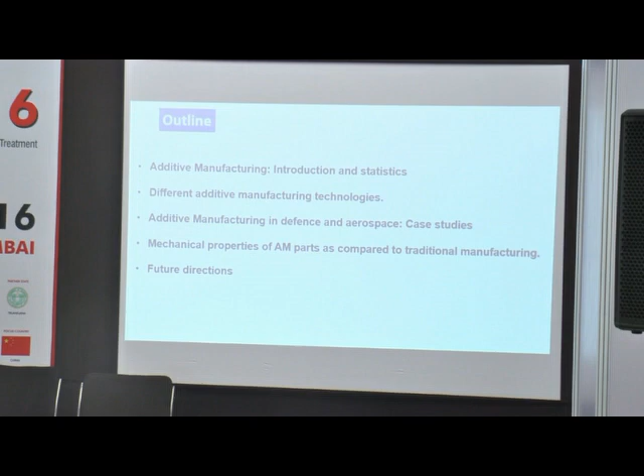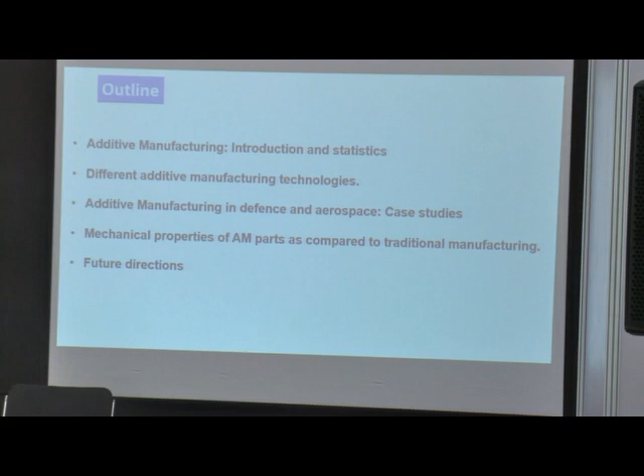So the outline of my talk would be, I'll give an introduction about additive manufacturing and all the statistics related to it. I'll just briefly touch upon the different additive manufacturing technologies. Then actually present the different case studies or examples which are used for the defense sector. Then moving on, I'll be comparing the mechanical properties of the AM parts as compared to traditional manufacturing, cast and forged and all that. Finally, future directions on making AM more inclusive or more popular, how to go about it.

So additive manufacturing, as per the ASTM definition, like what John had given yesterday, is basically defined as joining of materials layer by layer, where the input is directly taken from 3D model data. It is different from traditional manufacturing, which is subtractive manufacturing, because to come to the near net shape part, you have to do final machining and everything. In this, you do some machining to have a good surface finish, but what you get is a net shape part in the end. You feed a CAD model and you get a part out.

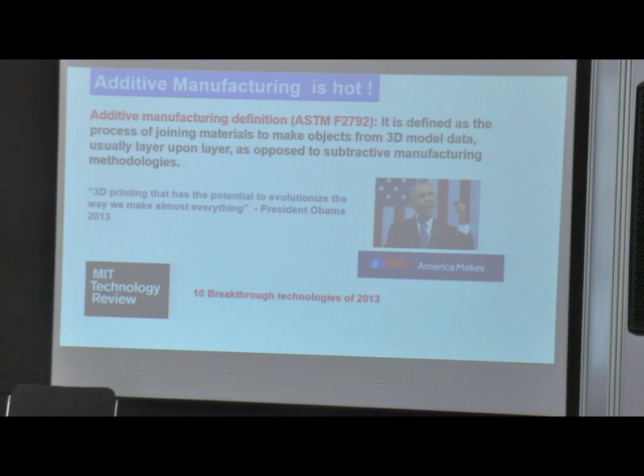Obama actually in 2013 declared that 3D printing is going to revolutionize the world. And I think it is living up to the hype. Additive manufacturing is just growing rapidly. And he has set up additive manufacturing centers, America Makes. It was also voted as one of the 10 breakthrough technologies by MIT Technology Review.

So just to give a snapshot of additive manufacturing, you have a CAD model, and you feed it in an STL file, which is a typical 3D printing file. It's called a stereolithography file. The file slices all the information layer by layer, which is given to the equipment or the machine. Then it starts printing layer by layer, and you get the final product.

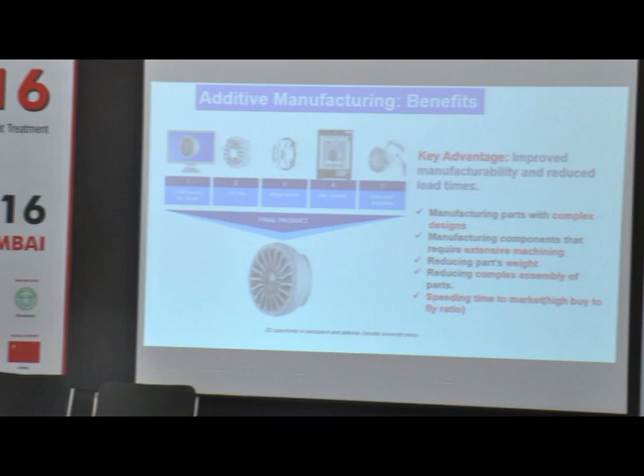So the advantage is you can have any complex design you want in the design model, and you can get that out. If the component requires extensive machining, it's better to go with additive manufacturing. It also has the potential to reduce weight, because you can come up with new designs which are strong but lightweight, like lattice structures or porous structures. And the assembly of parts can be reduced, because usually they assemble different parts to get a final complex shaped part, but in this you can directly manufacture. So you can reduce a number of parts to a single part.

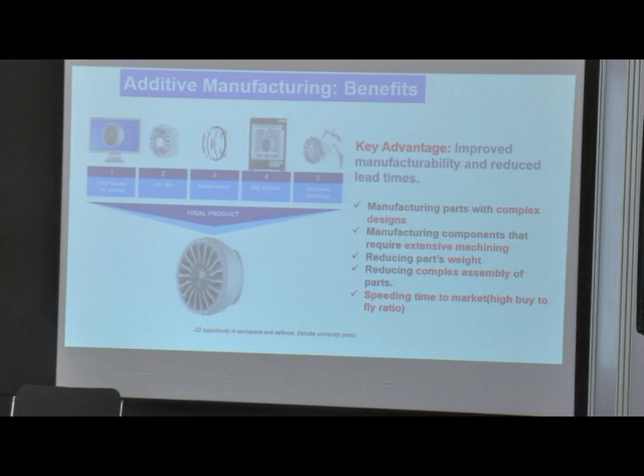So the buy-to-fly ratio is good, and the speed to market is fast. It can be termed as on-demand manufacturing, where you put a demand with a design, and then you get the part out.

When you look at government spending by country, Singapore is spending heavily. It's part of advanced manufacturing techniques, so apart from additive manufacturing they also invest in other techniques like robotic welding, robotic machining - all of those come into the same package.

In the US, only NAMII is giving about 50, and there's other investment in defense, Navy, and so on which I couldn't get figures for. But I think right now - this was 2014 data - it's spread much more, and many other countries have joined this bandwagon of additive manufacturing. I'm not sure about the Indian government; I think they still have to get into this.

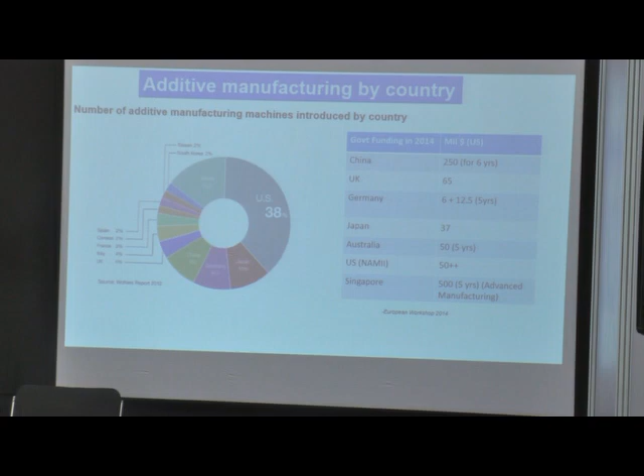As far as the number of machines is concerned, since the US is a big country, the maximum number of machines being introduced are in the US.

So I'll just briefly touch upon the different additive manufacturing processes, starting with plastics and polymers, and then moving to metals.

The first is VAT photopolymerization, also called stereolithography, where you have ultraviolet-curable liquid resin put in a tank, and a laser or ultraviolet source scans across based on the 3D model. Once a layer is scanned and set, it's lowered down to go to the next layer, and it's scanned again. This keeps going on until you get a final net shape part.

The advantages and problems are: it's usually very accurate and very fast, but has very limited materials, and it's also an expensive process. Traditionally, many of the plastics are used for prototyping, because once you get the final design in a prototype, you can quickly make the same design as a metal part.

So it has been used for prototyping and sometimes casting patterns. There is also a binder jetting process, where you have a powder - it can be a metal powder or a ceramic powder. You jet a binder and scan across layer by layer, so you get a green compact that binds the contour. Later you remove the excess powder and do post-processing like sintering and heat treatment. This is a much longer process requiring post-processing and curing.

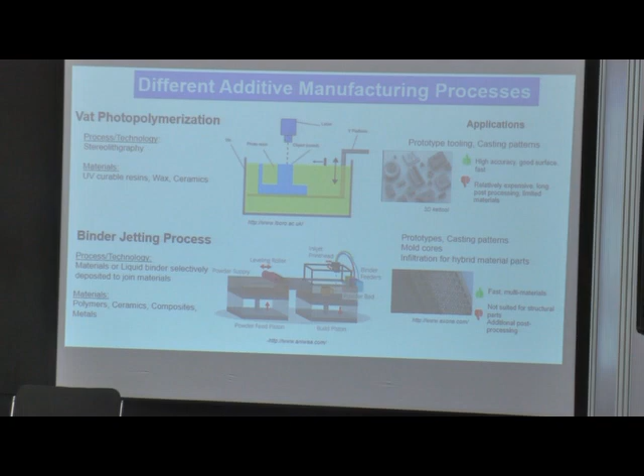But this can be applied to ceramics as well - ceramics, composites, even metals, we have a binder jet process. Also, one good thing is if you make a porous design, you can do hybrid materials - you can infiltrate with a second material. Like yesterday he was talking about having steel and infiltrating with bronze, and then you get a hybrid material.

Then there is sheet lamination. This is relatively less popular, but it's about having a sheet, then a laser or something cuts across layer by layer on the sheet, and the next sheet comes and binds on top, and the whole thing gets built up.

Material extrusion is like fused deposition modeling - you have a wire which comes in, and it can be applied to both plastics and metals. The wire is melted and then scanned layer by layer. Then there's a material jetting process - like binder jetting, you can directly jet the material, similar to inkjet printing, where you have material deposited there.

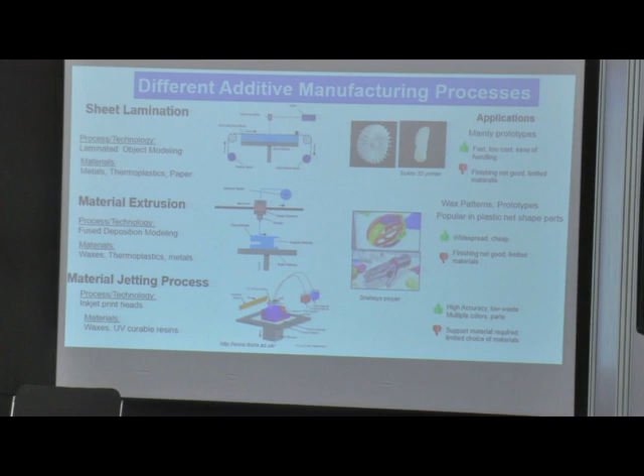For metals, the most popular ones are the powder bed fusion or the powder feed. The directed energy deposition is also called the powder feed process. So in the powder bed, you have a powder bed and a laser which scans layer by layer.

In the powder feed, the thermal energy, like the laser or electron beam, and the powder are all fed into the same spot. The melting and fusion happens there, and then the whole part is built up.

Because you have a very small powder size, typically about 40-50 microns, and the laser spot size is also very small, you can actually build really complex, thin-shaped parts through these processes.

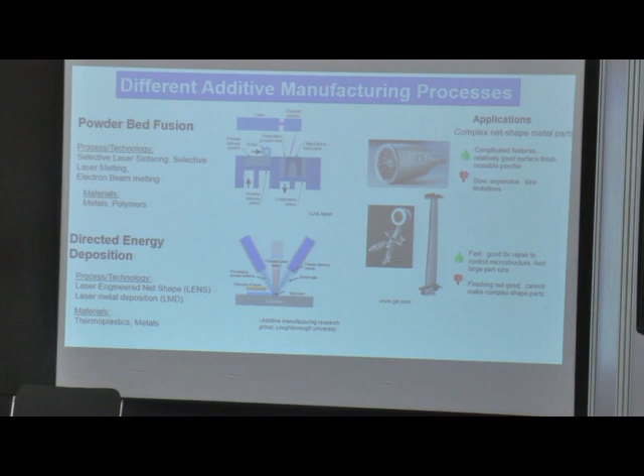Now I've just given you some of the advantages and also scanned upon the different technologies. So what are the main challenges now to go to AM?

Once you build an AM part, certification of parts is necessary. There are very few standard certification companies which actually have proper standards in place to certify the parts, both the quality standardization for the finished parts and also the powders.

And there are some legal IP related issues also. Suppose you have the same design which is printed via 3D printing or printed via the traditional route. So how is the conflict resolved?

Then, of course, the cost of the equipment is very high in the initial investment. There are slow printing times, and you can just go through the list of challenges which have kept additive manufacturing from going mainstream.

So here for defense, the advantages or attributes of additive manufacturing compared to traditional manufacturing are pretty similar to what I've discussed before. In defense, you get to manufacture complex shape design parts, and you have to come up with a new design each time because the technology is improving every time.

You have to come up with new designs of parts, customization to customer requirements, ease and flexibility of design, part simplification, reduced time to market because it's like on-demand manufacturing. There is waste minimization.

Then you have to store it in a warehouse, and then you distribute based on demand. So many times, a lot of parts are stored in the warehouse because the whole process, the steps, are so time consuming.

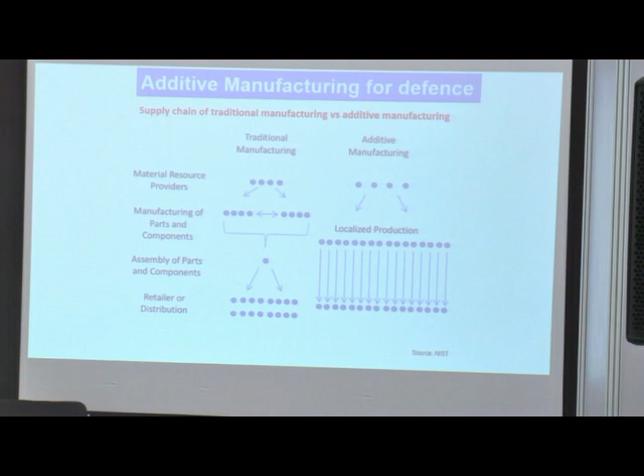And it goes to waste also, because whenever a new design comes up, it becomes obsolete. So additive manufacturing that way can have localized production. It's an on-demand production. Now you want this design, you want to produce this, you give it and you get it.

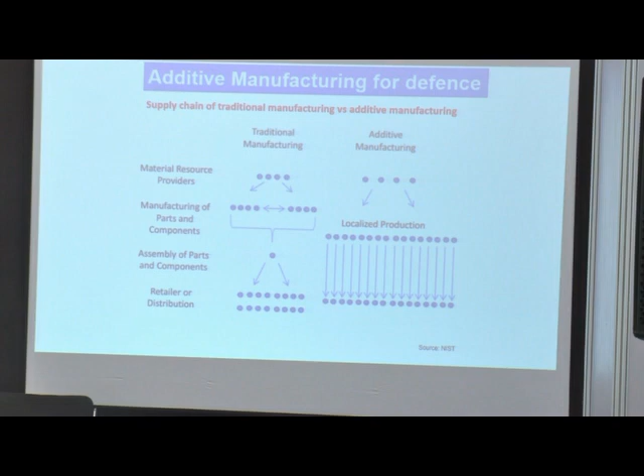So definitely the supply becomes much leaner, the supply chain becomes much leaner without much wastage or storage of the parts. So that's it.

For examples where additive manufacturing parts have been introduced in defense and aerospace, this was mentioned yesterday by John. This is the first critical component which seems to have been introduced in a V-22 Osprey flight for US Air Force - yeah, is it US Navy, I think.

It's a US Navy flight. This is actually a link which connects between the engine and the wing alloy. This is a critical component because if this fails, that's it, the whole aircraft has to be stopped. I think this is one of the first instances where a titanium part has been manufactured and employed in the flight.

And okay, there are many more examples like the Royal Air Force, British Air Force, flying Tornado with 3D printed parts. The whole list is given here. They also came up with the first 3D printed drone, which is tested by the Royal Navy.

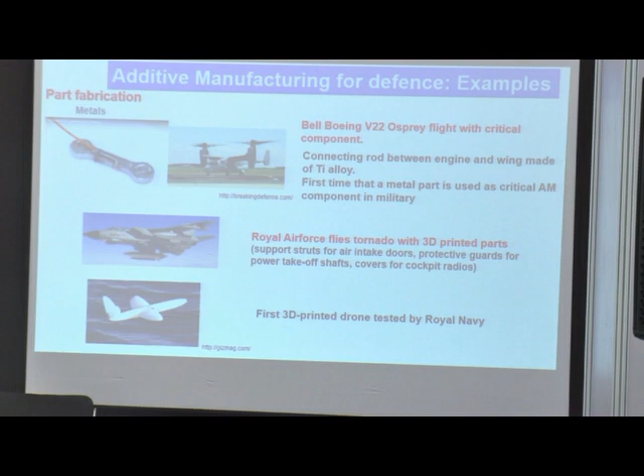And I was also talking about on-demand manufacturing. Many of the nuts and bolts are actually high-demand parts, and it's very hard to ship them to all the military bases because of the design. So many in the US Air Force have put up machines to produce them locally whenever needed, so the lead time is reduced drastically.

So there is also this fully additive manufactured gun. Again, the advantage has been a very nice design with reduced parts. Yeah, so that's it.

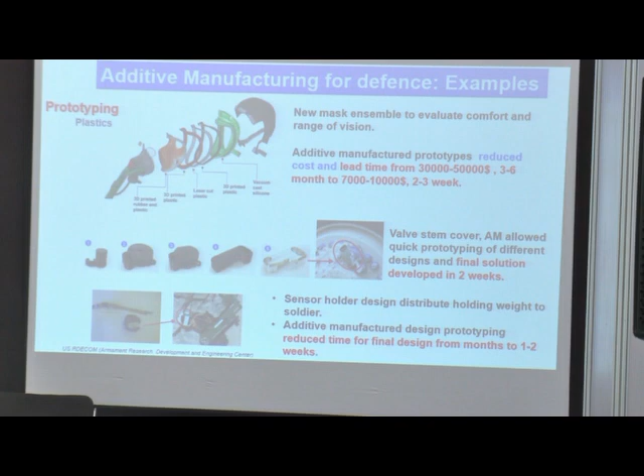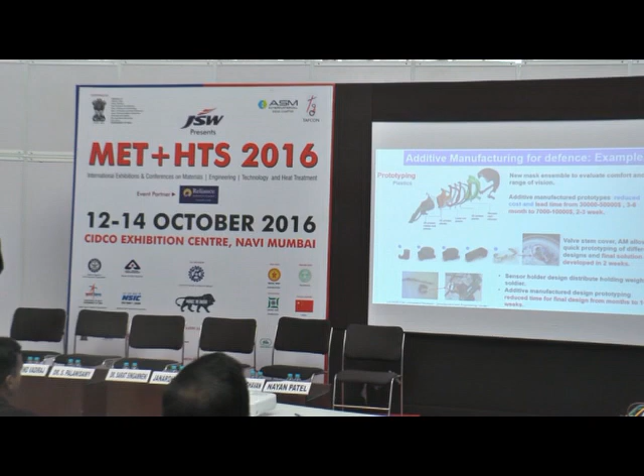For plastics, I think prototyping is the most popular way of additive manufacturing. Whenever they come up with a new design, a new mask ensemble with different parts, additive manufacturing prototypes have reduced their time and cost from 6 months to 3 weeks. Once they get the prototype, they go about producing the final product through any traditional route, which becomes cheaper for large numbers.

I'm just giving different examples. It's quite similar in the valve stem cover and sensor holder, where lead times are reduced. The dust caps for radios are fast and economical for plastics. The mounting brackets for mine detectors are another example.

Again for plastics, this is another case where the OEM was no longer making this part, but they still had the design. So they quickly used additive manufacturing to make the circuit card clip for submarine assembly. Many are also going about installing the AM machine in ships, for all the requirements needed in their ships or submarines, so it can be catered through additive manufacturing.

The other thing is embedding sensors, like Dr. Sudarshan was saying yesterday, making your helmet or headgear smarter so you can embed sensors for better communication and better information. This is also going on in the US Department of Defense.

Additive manufacturing of casting cores is quite common now, both in defense and also outside, with a lot of time savings in cost and lead times.

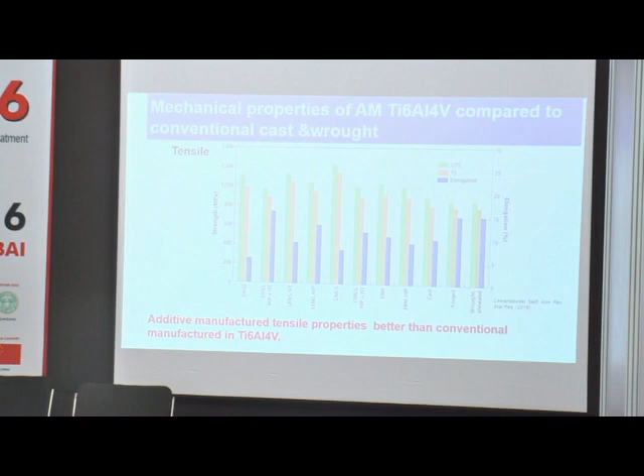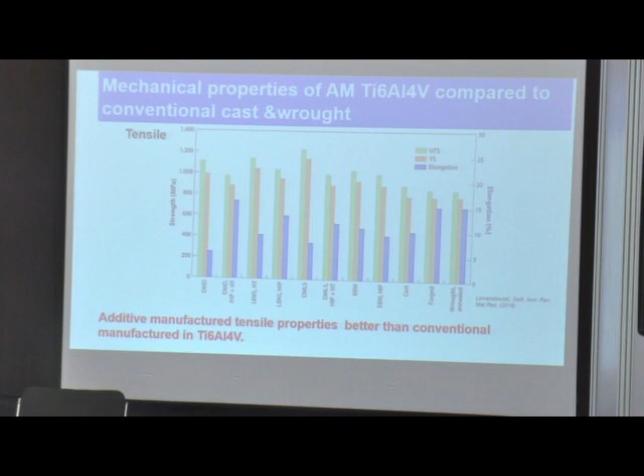But once you do a heat treatment, like the heat-treated samples here, or if you go to EBM, which has a powder heating system inside, the ductility is better. So in general, the properties match or are even better as far as strength is concerned compared to traditional manufacturing.

So just to give who are the market leaders in adopting additive manufacturing, it's again Airbus, Boeing and GE, they are leading. There are other companies also coming on the way.

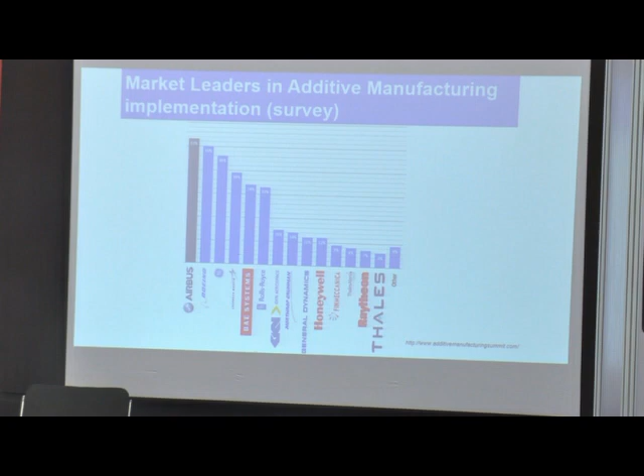I think to conclude my talk, what is actually required to make additive manufacturing more successful, especially in aerospace and defense? All the parts are not suited for additive manufacturing. It's specific parts with complex designs, where the number of parts may not be very high. For example, for automotive, where the number of parts is so high, it may not be that successful. The economics of scale may not work out well for additive manufacturing. But for high mix, low volume kind of manufacturing, additive manufacturing parts are very advantageous.

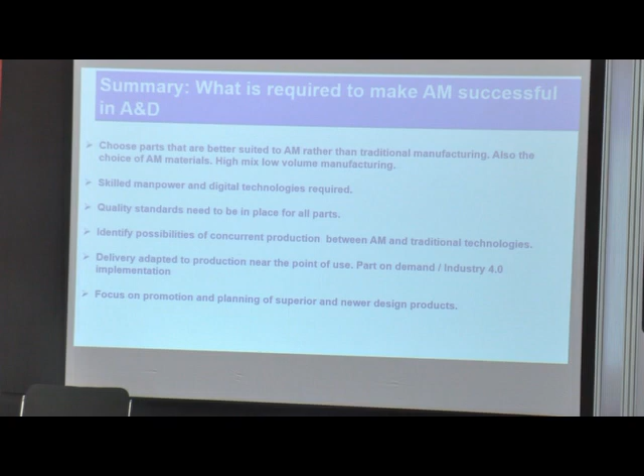You also require skilled manpower because it's a high-tech machine, and there are a lot of digital technologies involved. We need to put all the quality standards in place for all the parts and the powders. And to make additive manufacturing more inclusive or to penetrate more, we need to see the possibilities of concurrent production of additive manufacturing with traditional manufacturing. So you have a traditional manufacturing plant, and can you also install an additive manufacturing machine to make some parts which are not easily manufactured by traditional manufacturing? So like a combined manufacturing place.

And also delivery adapted to production near the point of use. It's also called part on demand or Industry 4.0, which Dr. Satyam was talking about yesterday. You place a demand and you get a part, so that it's close to the point of production.

And they have to focus on promotion and planning of newer designs, superior designs. We need more focus on this because now we have a way using additive manufacturing to actually build it. So you have to think more broadly to come up with new designs, better ways of manufacturing products. That's all I have. Thank you.

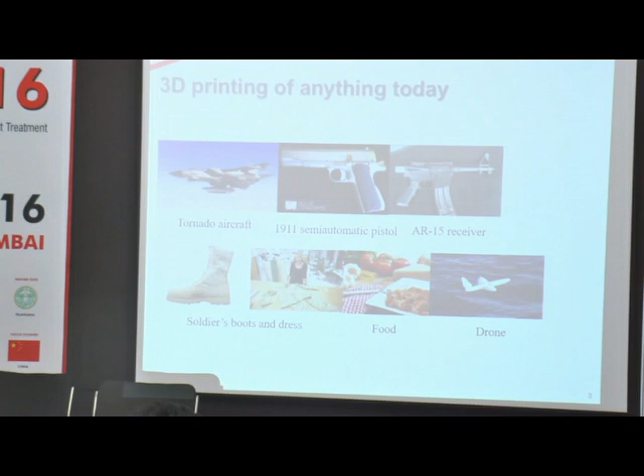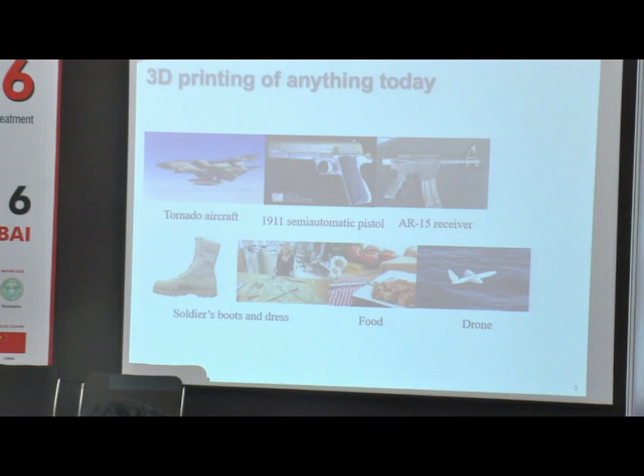Even drones and even soldier boots. It has penetrated all segments, even food, the medical field, such as even building organs. Back in the 90s itself, they were making human organs, even blood, veins, so many things. The textile industry, the food industry, everywhere it has penetrated. Now going forward, this is a little different from what Srini has shown.

And it is gaining a lot of momentum, especially in the first three areas, that is aerospace, medical and automotive, and of course something in education, consumer goods, etc. Wherever a good amount of customization is required, this is the best manufacturing process, as we know. In the Indian market, primarily it is, as I told you, automotive, electronics, and the rest.

With regard to automotive, Mahindra itself has been using this technology for the last 15 years. We have been printing some small parts and looking at the fit and form of certain parts and things like that. So this is an air intake which has been made by 3D printing. This is by CRP Engineering and Magneti Marelli together.

See, you can also save weight. You can check, you can do a lot of analysis beforehand. Before release itself, you can do a lot of testing: the fit and form and the surface quality, etc. A lot of iterations can be done in this. We have been doing this for the last 15 years; we have a machine and we have been doing this.

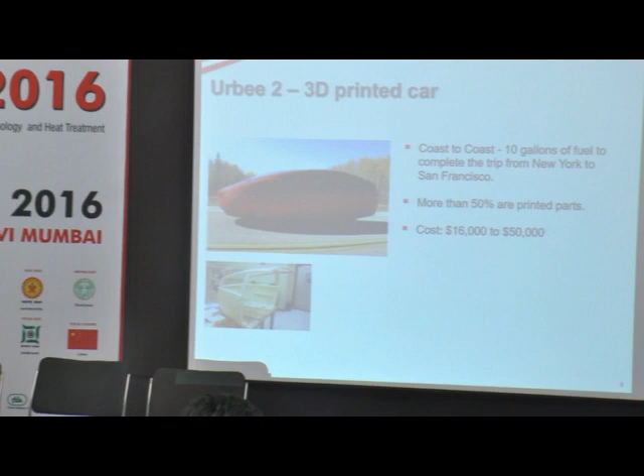And this is just parts, automotive parts. But if you see, the whole car has been printed. At least 50-60% of the parts here are printed parts. This is Urbee 2. At least 10 examples you'll find in the public domain of 3D printed cars. And especially Rolls-Royce and BMW, they're using even functional parts, interior parts. More than 50% of the parts are printed here.

And then you see this particular car is so lightweight, it can go from one coast to another coast in the US with just 10 gallons of fuel. It's such a small amount. And the second example you see is an autonomous vehicle. It is a 12-seater bus. Here also more than 50-60% of the parts are printed. It's a 12-people capacity bus.

And this bus can be brought to your home, app based. Just like you order Ola and Uber here, a taxi, you can order the bus also there. This is undergoing a trial run in the UK. And you see, the parts are printed in just 10 hours and assembled in 1 hour. This kind of production time, you don't find exactly in conventional manufacturing.

And another example is a 3D printed stainless steel bike. The entire web structure, what you see, is stainless steel, and it's printed layer by layer with stainless steel blobs. And you can make such good designs. You can customize it very easily. This is one area you can customize, because in the area of non-motored transport, you don't have rules.

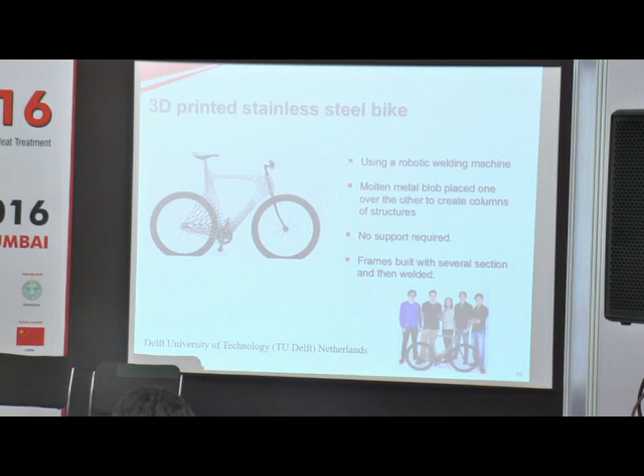Because in case of a car or bus, or a bike, you have CMVR rules. You have to stick to the CMVR rules. You need a license, a license plate, registration, everything. But in case of these things, you don't have registration or license. You can make any shape, any length, anything you want. So a lot of customization is possible in this area. And this is done by one university, Delft University.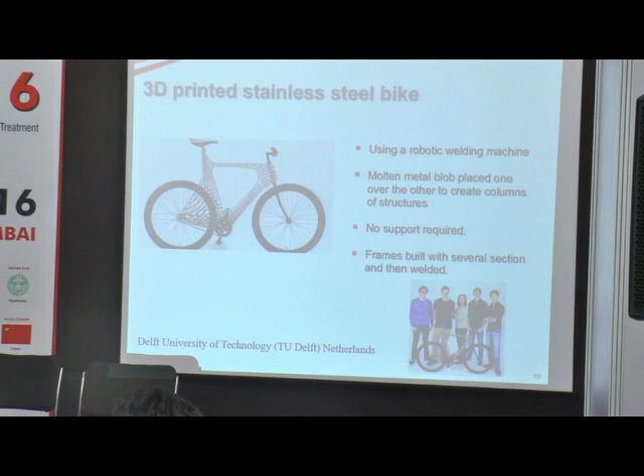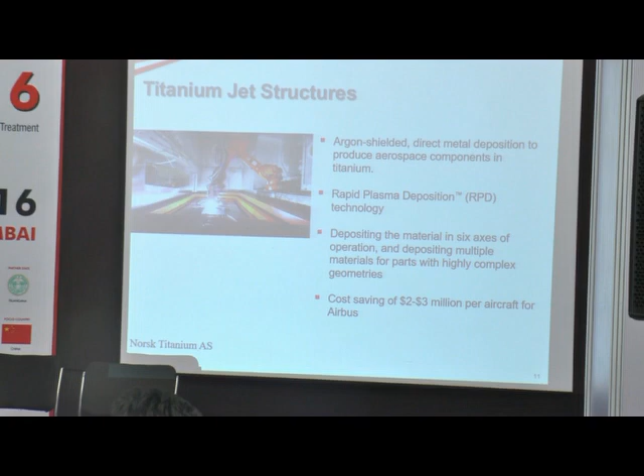Next is titanium jet structures. The one thing which I didn't see is the cost saving, which is about 2 to 3 million per aircraft, a saving just by making this part, which was not there in your presentation. And it's done by rapid plasma deposition. Of course, aerospace is one area where customization is very much on demand.

And another thing is the cabin partition. These are also printed. They've developed a special alloy called Scalmalloy, which is about 45% lighter, for 3D printing purposes alone. And they've done around 10,000 iterations to get this part. So next time when you go on a flight, probably you will see these cabin partitions. Currently it is Ultem material, which is also an aircraft material.

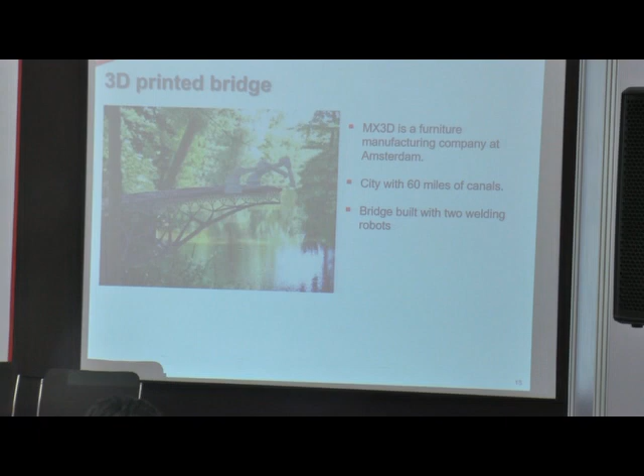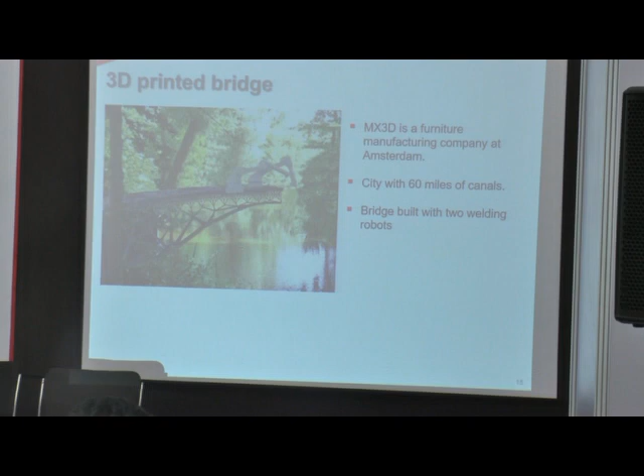And you can see this is a 3D printed bridge. In one place in the Netherlands, they have 60 miles of canal. There is no way you can just go from place to place; you have to build a bridge. So here, one furniture manufacturing company has developed welding robots. They're using welding robots and printing the bridge. The bridge can be printed by robots from each side and they join in the middle. So within hours, it builds the whole bridge.

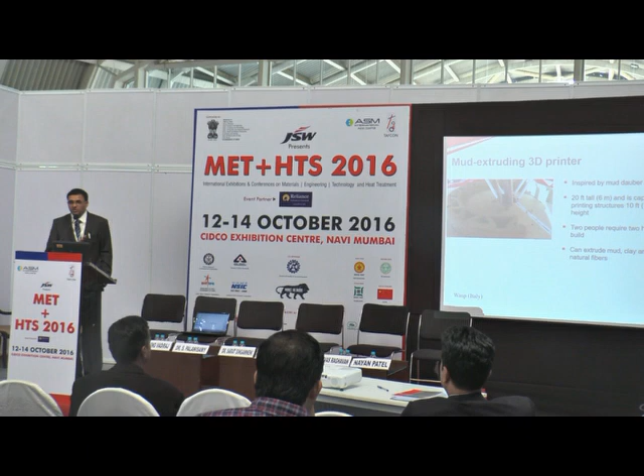And if you see this mud extruding 3D printer, this is from I think WASP in Italy. They take the raw material, which is mud, clay and natural material mixed together, and they print very low cost housing for you. This is another innovation which in the poor parts of the world, probably in the very underdeveloped nations, is going to be very useful.

It is 20 feet tall and is capable of printing structures up to 10 feet. 2 people and 2 hours, that's what is required to print this, nothing more. It can extrude mud, clay and even natural fibers, which are all natural materials available anywhere across the globe, you know. And this is very fascinating.

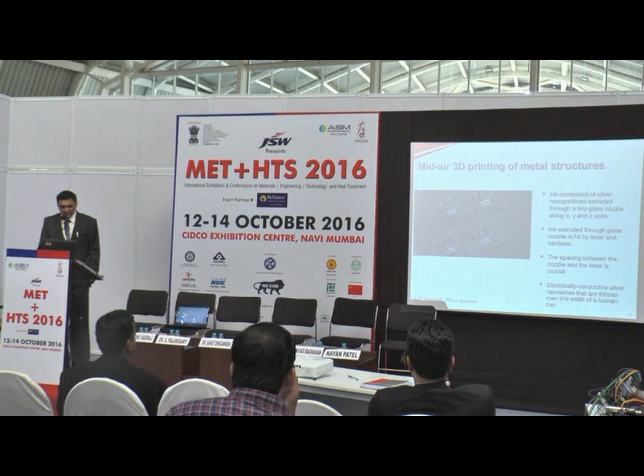You can print metal parts in mid-air. And this video I saw, it was very, very fascinating. See, there are some kind of 3D printing pens which are available, which you can use and print some structures just like that. But that is plastic, that is for fun and for plastic casing. But here, it is metal. They're using silver particles in ink.

And they're ejecting it through the nozzle and passing a very fine laser at the nozzle tip, which immediately melts the silver and attaches it to the part. And immediately you can get a mid-air structure like this, which is like a butterfly and things like that. So probably in future you can build these building structures also in mid-air without any support, you know. So these are all university researchers. I think this is Harvard University. And the next thing is from University of Bristol, yeah.

Typically when you make a composite part, it is very difficult to get the alignment of the fiber, especially if it's a chopped fiber. In a long fiber, fine, you can align it, whereas in a chopped fiber, it is very difficult to get a proper alignment of all the fibers so that we can give strength in a particular direction. But here, just by ultrasonics, they're able to give direction to the particular fibers and they can give strength in that direction. So that's what it is.

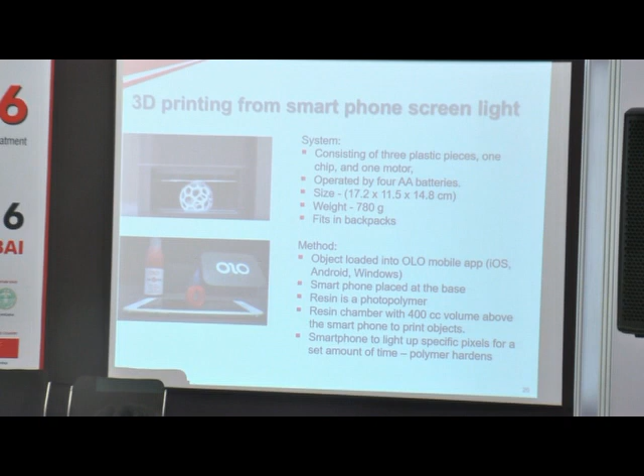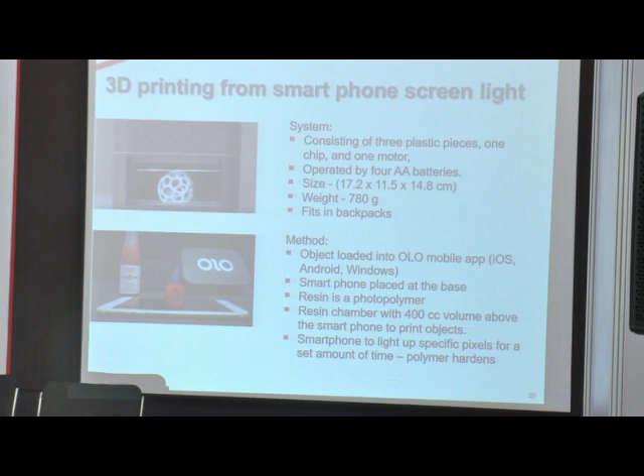It goes from top to bottom. And if you see, this has only 3 plastic pieces, 1 chip and 1 motor, that's it. And less than a kg, that is about 780 grams. It's built by Olo. So these are fascinating innovations that have happened.

Printing the whole part, layer by layer. You take different layers of metal, keep them one above the other, and then pass the roller with the ultrasonic input, ultrasonic waves. This will bond the layers, give a very strong metallurgical bonding, and produce very strong sheet layers. So this is another innovative way of producing a 3D printed part. It can be aluminum, copper, stainless steel, even titanium.

So all these things. Five more minutes, I'll finish.

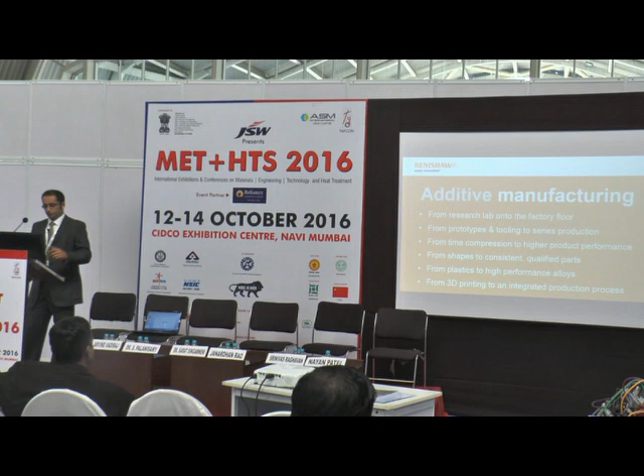What we've done is broken it down into different layers, what we like to call levels, or a staircase. The first one is rapid prototyping or tooling. This is where we normally say everybody is considering it today. Some people are more advanced than others, but most people only consider this technology for rapid prototyping or tooling.

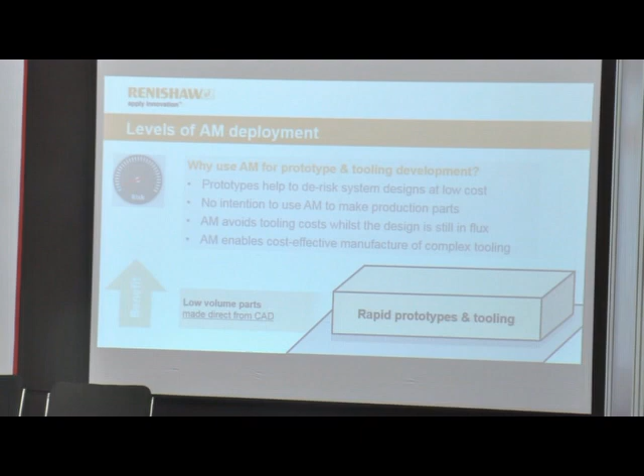The next step onwards is direct part replacement, where you may have a process which is obsoleted - you can't make that old part, so you use additive manufacturing to do that. The level above that is what we call part consolidation. I have examples to show you what we mean by all these, by the way. But the ultimate use for this technology, we believe, is actually designing a part for additive manufacturing.

It's unfair to take a traditional part which you manufacture in a factory and say 'make this in additive, it'll be cheaper.' That's not what additive manufacturing is.

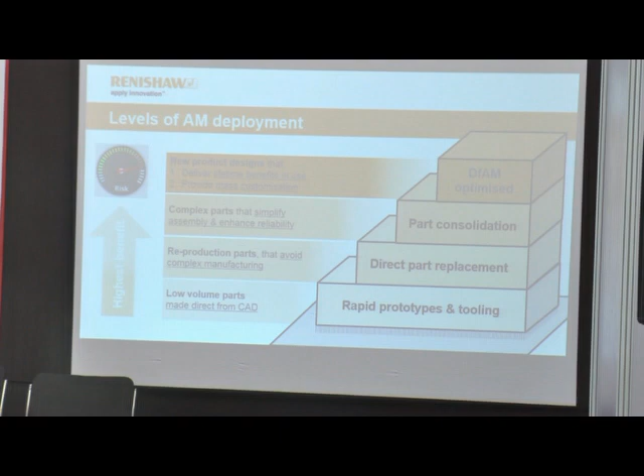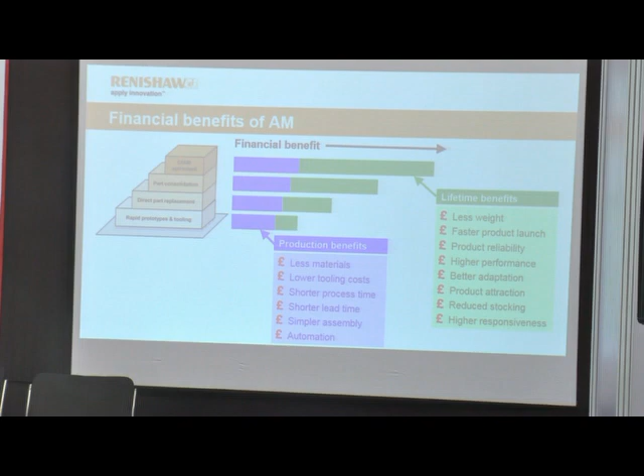As I said earlier, if you look at the financial benefits - because everybody wants to know about financial benefits - as far as the staircase is concerned, at the bottom it's not a really good use for this technology. The benefits are low, production benefits are low, lifetime benefits are low. The more you move up the ladder, the more benefits you have.

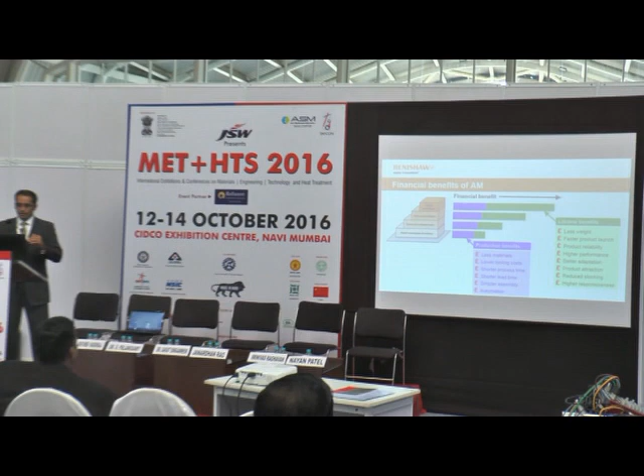It means the material usage is better, so your cost is less, shorter process times, etc. But look at the lifetime costs - weight is definitely more important because most of these are aerospace parts today. Faster product launches - we're helping companies reduce their prototype life cycles from many months to 1 or 2 months. Product reliability is one thing too, because you can actually design much more, with less compromise on performance, etc.

As I said earlier, AM has brought disruption to the industry. Everybody wants a piece of this additive manufacturing, but what are they going to do with it? This is what we're finding - it allows you the listed items: design freedom, precision, automation. There's a lot of things this technology gives you, but how do you employ it in your process?

You have to buy a machine - there's a lot of machines which have been bought in the industry, but not many people know how to use them or what to do with them. So what we believe is that we want to educate the customers as the process goes on.

Going back to the staircase, the first one, prototyping and tooling - I've just shown you some examples here. On your left-hand side is a typical part which we get asked to make because they make it today in a normal process - can we make it here? Conformal cooling is another application where we are finding this is a very, very useful technology.

Why? Because you can build in cooling channels in your injection molding. Now, you may say, I don't need my injection molding to last that long because things change every year. But this gives you better parts, better finish, and quicker release time. So there are many different advantages.

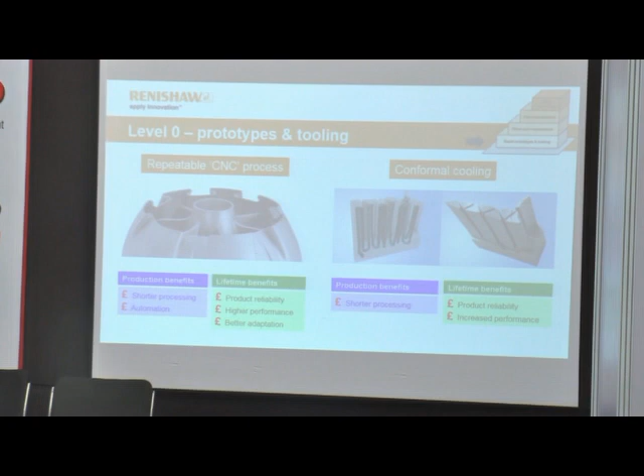So the next level up is direct part replacement. On your left-hand side, you see a typical example of the usage of material. To get the part in the center, from a subtractive point of view, you would have to use nearly 5 kilos of material, where the machined-away parts cannot be reused. On the right-hand side is the powder, which is just over 1 kilo. You machine a few hundred grams away and you end up with a part. So the usage of material is much more efficient.

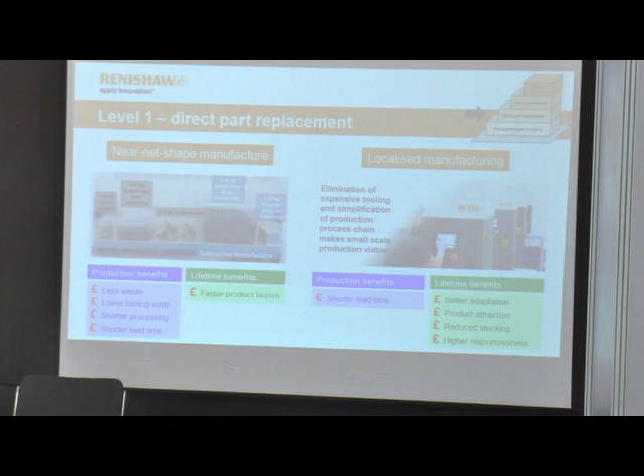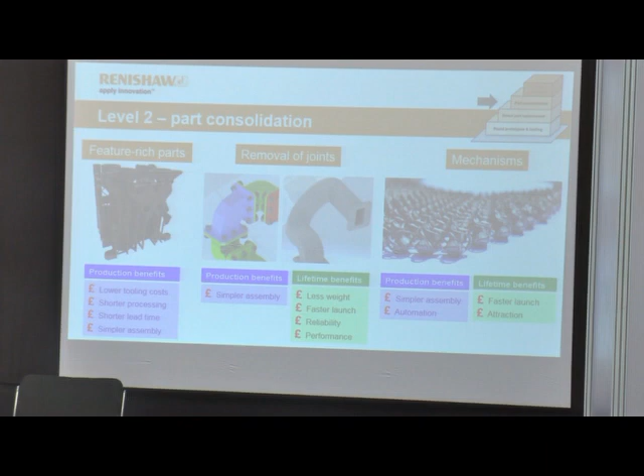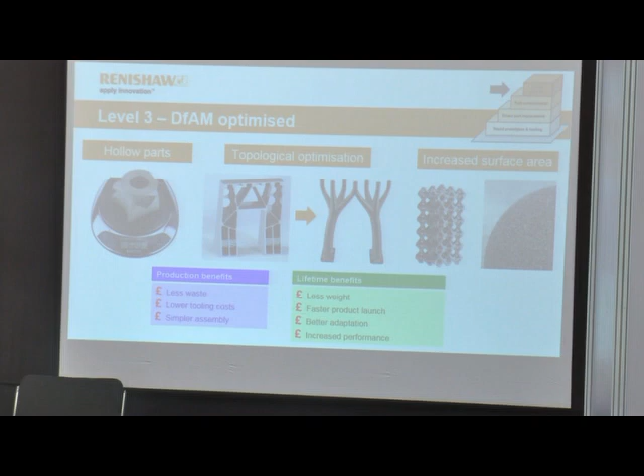As far as mechanisms are concerned, we've been approached by consumers asking where can you make some jewelry out of titanium, etc. Those things have also been attempted. However, this is where we believe the true potential of additive manufacturing is - this is where the freedom of this technology can be realized.

So if you look here, we call this a hollow part. This is a real-life example of a part which a company gave us, and they said, can you optimize this in terms of weight? It shows 620 grams - when we started, that part weighed 1.5 kilos. This part, physically and mechanically, is the same shape and gives you the same performance, but it's less than half the weight. It's a real example of additive manufacturing.

Next level up is topological optimization. In the center, there's a squarish bracket. Another company approached us saying, can you do something about that in terms of saving weight? It's also space critical - this is actually going up into space. Can we reduce the actual amount of volume used? When you put it into a computer, you get something we call 'fingers of faith.' When you take that to a normal manufacturing shop, they'll say, how do I make that? So additive was the answer.

Then we also learn about applications. One of the things we've learned recently is increased surface area. Many people would say, why would you want to do that? Well, to dissipate heat, or the other way around, because a lot of electronics nowadays generate a lot of heat - how do you get rid of it? So additive is helping when you can effectively manufacture, as the next slide says, metal foams, which allow you to dissipate heat very, very quickly.

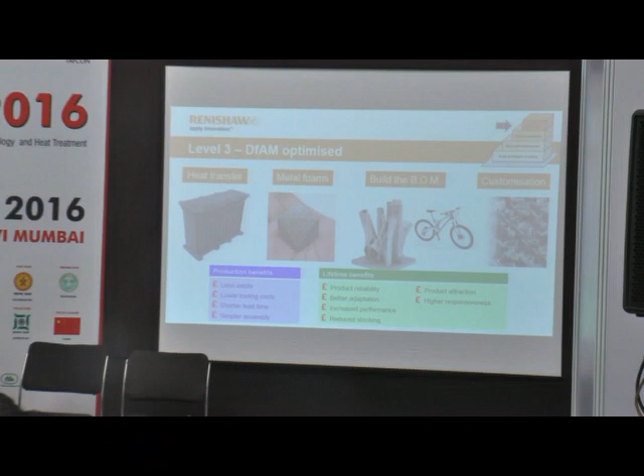Customization - this is something I'll come onto in a minute, but customization in terms of medical is a huge, huge potential for additive manufacturing.

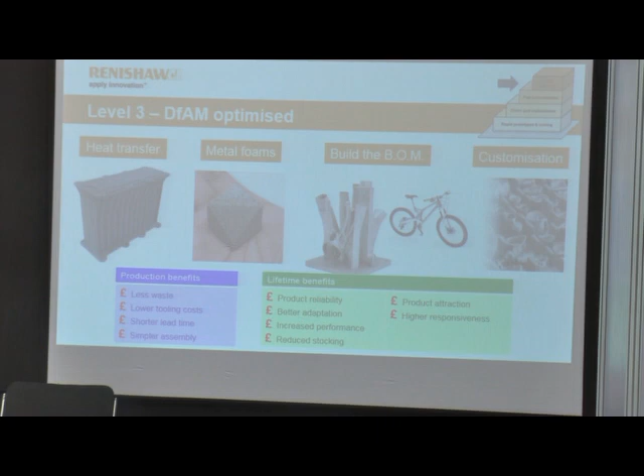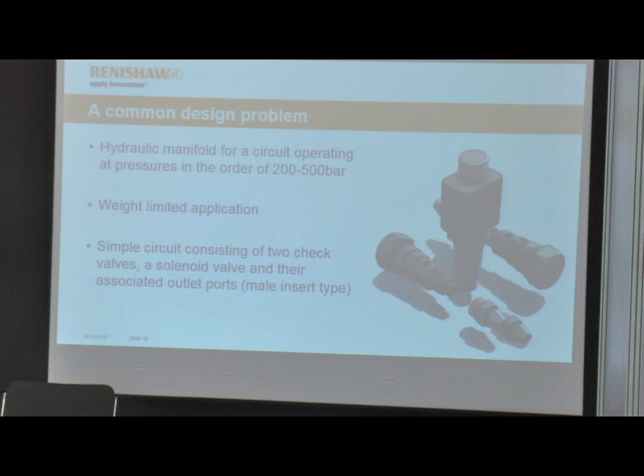So let's just go through a very common problem. This is a company which approached us. They have a manifold requirement - it's a weight-limited application, basically high pressure, with some solenoid valves and some outlet ports.

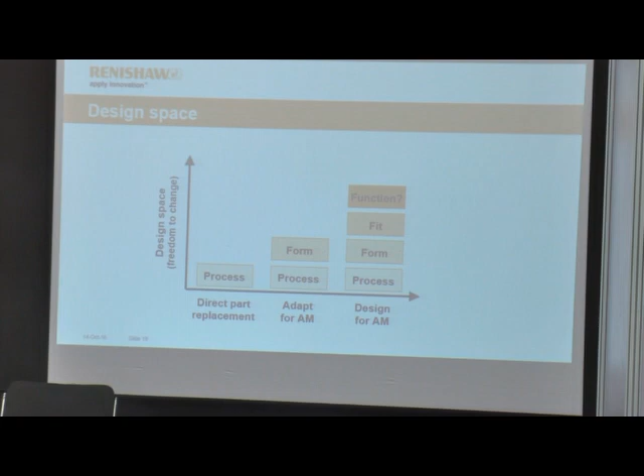But let's look at it in terms of design space - how much freedom you have to design. With direct part replacement, going back to the staircase, you don't really have a huge amount of design space - everything has to be the same, just make it. With adapted for AM, you have a little bit of freedom, maybe the angle of the pipe changes. Design for AM means it's a clean sheet - you can do what you need to do. The effect of that is huge.

So what Renishaw is trying to do is lower the barrier of AM. AM technology is not cheap, we know that, we've done a lot of research. What we're trying to do is set up additive manufacturing solution centers around the world, and I'll talk to you about what we're trying to do. It's a global network - India is the first one to be established, in Pune.

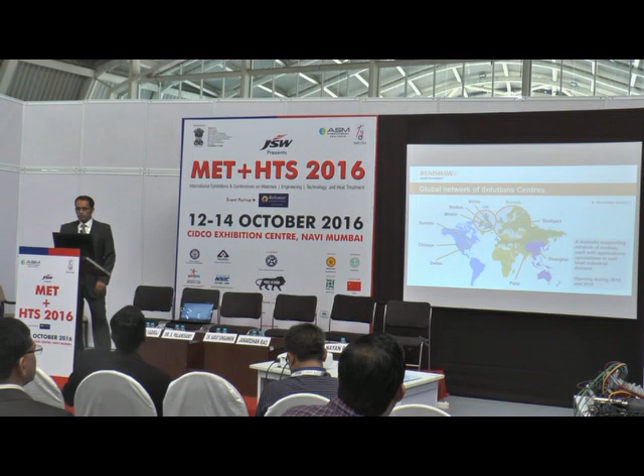Application expertise worldwide - we have almost over 100 engineers dedicated to application engineering for additive. Our main business is integrated manufacturing, so we understand manufacturing very well. To give you an idea, these are the locations of all our additive solution centers. As I said, Pune was the first one, and we have Shanghai, Stuttgart, etc. They're all going around the world and will all be open by the end of this year.

Let me talk about the Additive Manufacturing Solution Center. One of the first things we are offering, even in India, is what we call an incubation cell. As a company, if you say you want to try additive manufacturing, how do you do that? You go to a service bureau - they're very good, they will typically do exactly what you ask them to do. But what about how you design this? Can I optimize some parameters? Can't do that, right?

What we do is rent you a machine in a room, and you can experiment. You can have our help, or you can lock yourself away in that room and do what you need to do with that machine. So this is a concept we're introducing to lower the barrier, because look at the costs of buying a machine versus renting a machine on a monthly basis - it's far cheaper.

Attached to the incubation cells will be offices, pre-production - which we don't have set up yet in our Pune office - powder management, finishing, heat treatment, post-processing in terms of machining and CMM inspection, and most important, a materials lab. In the industry, as soon as you mention additive manufacturing is printed, people have doubts about the porosity, the composition of the material when you finish with it, etc. So as Renishaw, we will give you a physical verification of the part and a metallurgy verification of the part as well.

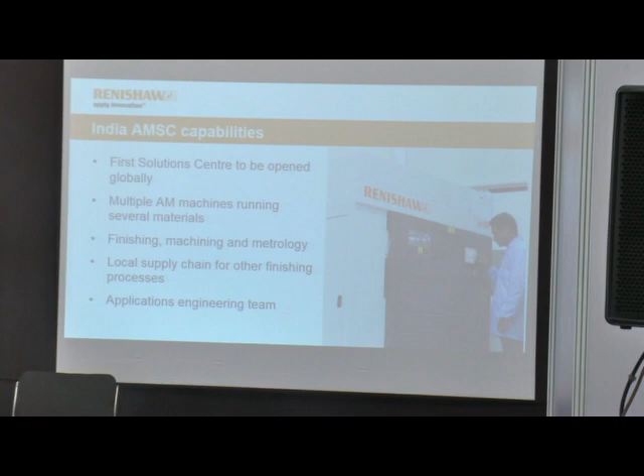As far as the Indian facilities are concerned, it was the first one to be opened, in June. We have 4 machines there now running, with finishing, metrology, all the services available. We've developed a lot of local suppliers to do a lot of the post-processing for us - some things we don't have, or may be too expensive to do, so we get it done outside. We also have an applications engineering team.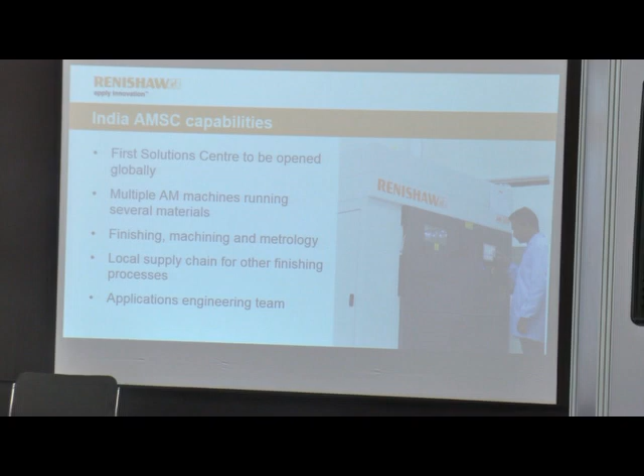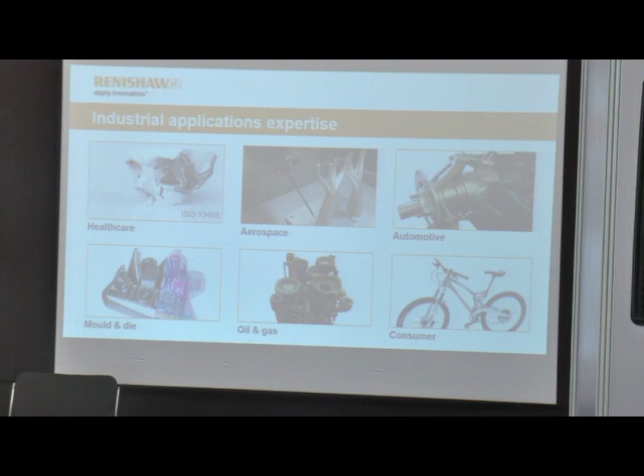So what have we done with additive in the industry? Healthcare, aerospace, automotive, die and mold, oil and gas, consumer - they're all our customers today. In healthcare, we have a 13485 approved laboratory in the UK running, making medical components. That's a big tick mark for the additive manufacturing world, that medical people are accepting parts made in additive.

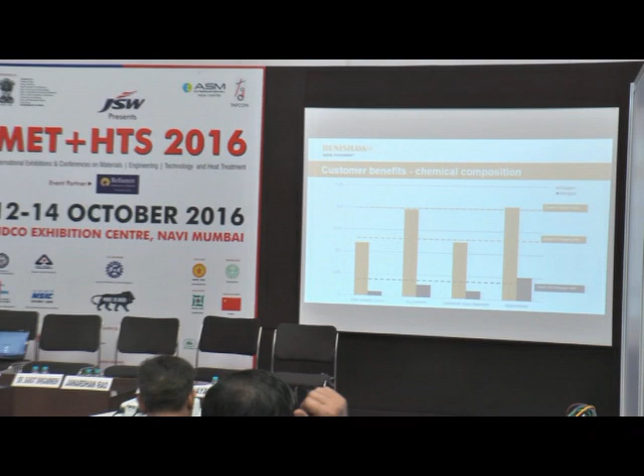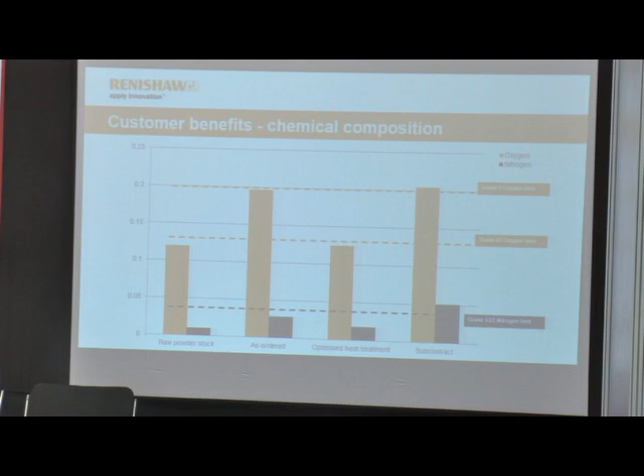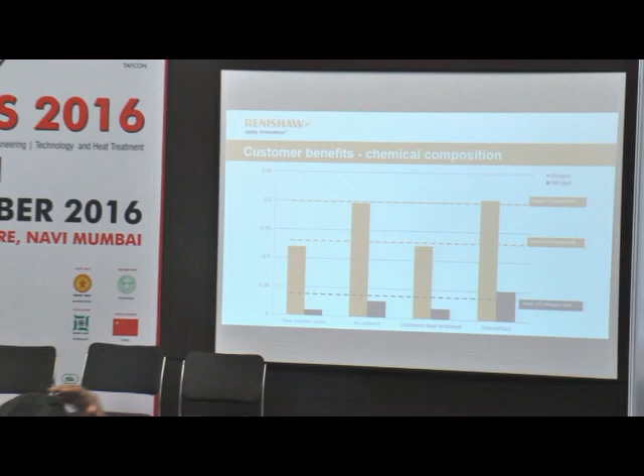Okay. Sorry to put a graph up, but I had to do this. So this is the oxygen level and nitrogen level content of titanium powder. In titanium alloy, there are 2 grades which we deal with, grade 5 and grade 23. Grade 23 is the one we should be using for medical purposes. Now, if you look there, we have developed an optimized heat cycle which will allow you to produce grade 23 ISO 13485 components in our system. So the system does not do anything to the powder, it keeps it as it is.

So what does that all mean? Well, what we're trying to do is remove this word additive. We want to call it just manufacturing. This is our vision, this is our goal as a company. That's what I'm standing here and telling you guys. That's all I have to say.

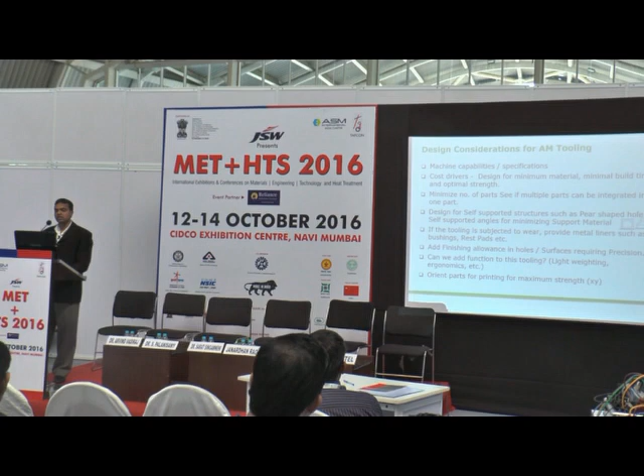Some of the design considerations for AM tooling. Whenever I'm designing a tooling through additive manufacturing, the first thing I need to know is the machine capability and its specifications. The next thing is the cost driver. As you know, additive manufacturing is a costly process, so you need to design for minimum material and minimum build time, without compromising on strength.

Also see if you can minimize the number of parts, consolidating them into integrated structures. And see if you can design for self-supported structures. As I said, in additive manufacturing, material and build time are the main cost parameters. So if you have shapes which require support material, you should try to avoid that.

Here is a typical example: a hole. If you want to make a hole, see if you can make it a pear shape so that you can avoid support material there. Also, if your tooling is subjected to wear, especially in the case of a plastic or polymer tooling, provide metal liners such as bushings and wear pads.

As you know, in additive manufacturing the accuracies are not that good, so if your application is of a precision type, you may have to add finishing allowance on surfaces requiring precision. Also see if you can add function to your tooling, like lightweighting or ergonomic features.

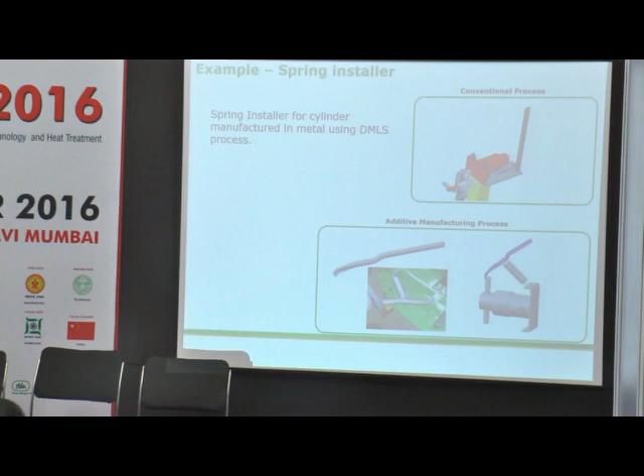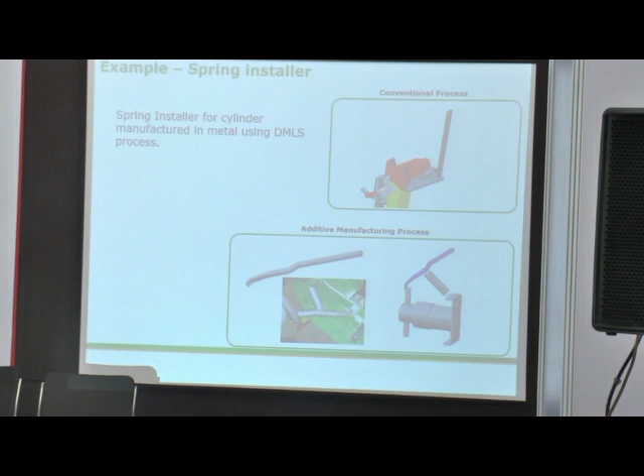So with the additive manufacturing process, we are able to design a tool, and you can see that at the bottom. It's an odd-shaped tool, but this is possible only by the additive manufacturing process. If you want to do it by a conventional process, it may be very difficult. So you can see a bulky fixture turned into a small tool.

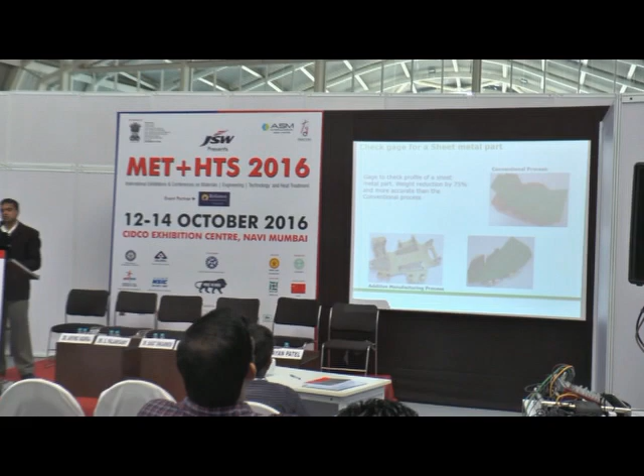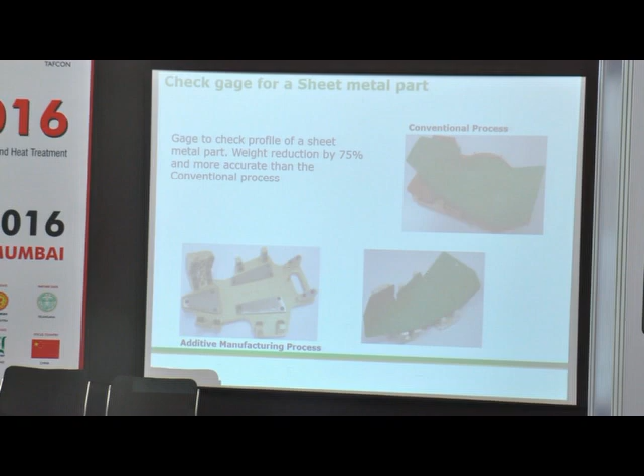So the next thing is actually a check gauge for a sheet metal part. This is almost a 500 millimeter big part. In the conventional process, you can see on the top right hand corner, it's made of sheet metal. Basically that gauge was made by a laser cutting process, held together by a slot and tab mechanism, and welded together. And the main challenge here is the weight. The weight of the tool is almost 10 kilos.

Normally, whenever there is a batch change, the operator takes that gauge from the rack, inspects the first couple of parts and puts it back to the rack. So the main issue here is the weight, and you want to reduce the weight. So you can see below.

So we printed that in plastic, basically. It was printed in polycarbonate, and since there is metal to plastic contact, we want to increase the durability of that tool, because plastic wears out very fast when it comes in contact with metal. So we have provided metal liners there, you can see. With this we are able to reduce the weight from 10 kilos to around 2 kilos. So that's the advantage we have with this process.

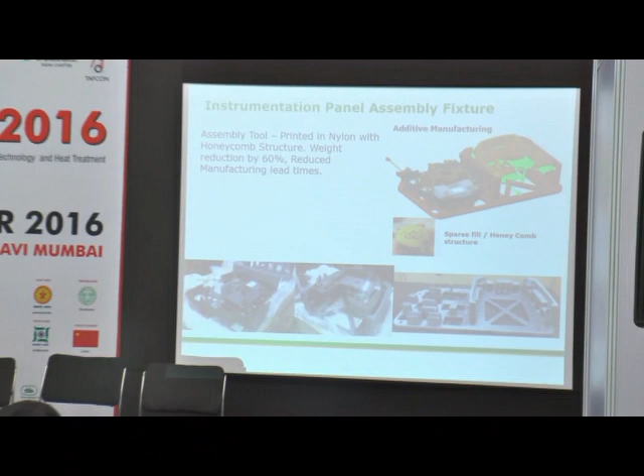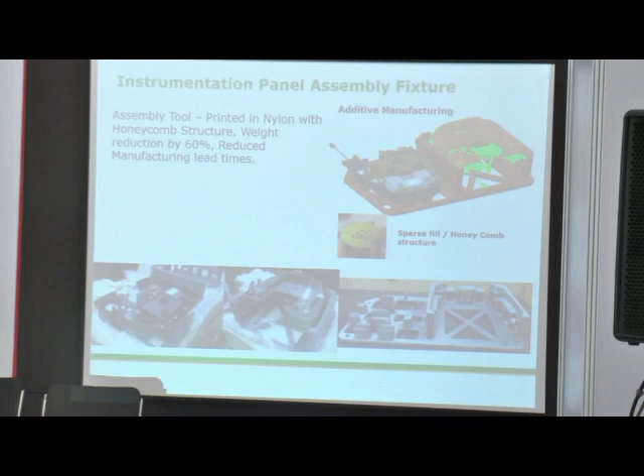So we have designed a fixture, you can see at the bottom, and while printing, in 3D printing we have a feature of a lattice. We can give a lattice for weight reduction. Basically we call it the honeycomb or lattice. So we have used that feature and were able to reduce the weight by almost 60%. And also this was printed in around 3 days time. If you want to do it conventionally, it would take at least a month's time, but we are able to do it in 3 days time.

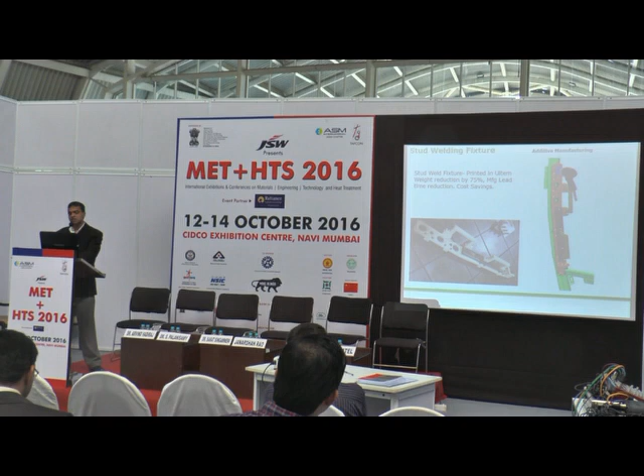Again, a weld pick-off tool, printed in Ultem with some metal liners. And here you can see we have given a reinforced carbon fiber handle. That handle also is 3D printed. Okay, so it's printed with chopped carbon fiber. This is a stud welding fixture. Again, here the challenge is the weight. So we're able to reduce the weight by around 75% here.